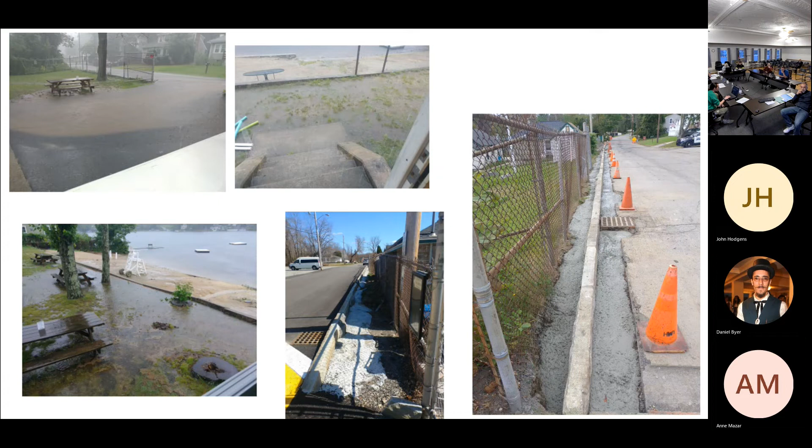So this is just kind of an overview of the project. Ideally, funding will get approved in May. We would then prepare an RFP to go out to bid for the base of this project. Some of this we can do while we're open, some work on the sidewalk. You're saying the funding approved, that's a separate article.

So this request, we're asking for $300,000. We would then award contracts in July, and the idea would be the work would start basically August 30th, as soon as we close. One of our challenges is we're open in the summer, so we have to kind of work around this so we don't lose the whole season. But we're hoping the majority of the big work can get done in the summer and the fall, and then that leaves the spring just for the final landscaping.

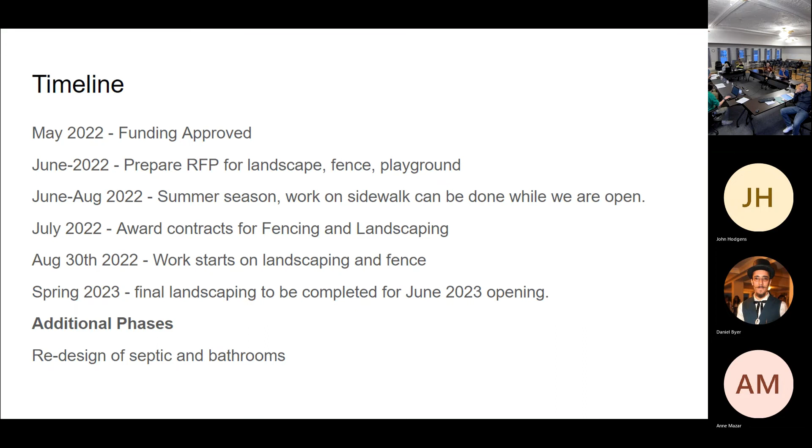People are looking to stabilize it too. I think most of the site work should be done, retaining walls, all the trees. Honestly, even initial loam and seed probably won't grow very well.

We'd like to replace the playground. There's a photograph of what's there now, which is kind of not much. There was a swing set that got taken down to make room for tree work. So it's gonna be a new playground area with 4 to 6 swings and slides. We're still working with the playground company on the specifics. They wanted to see these plans done before they start doing all the drawings.

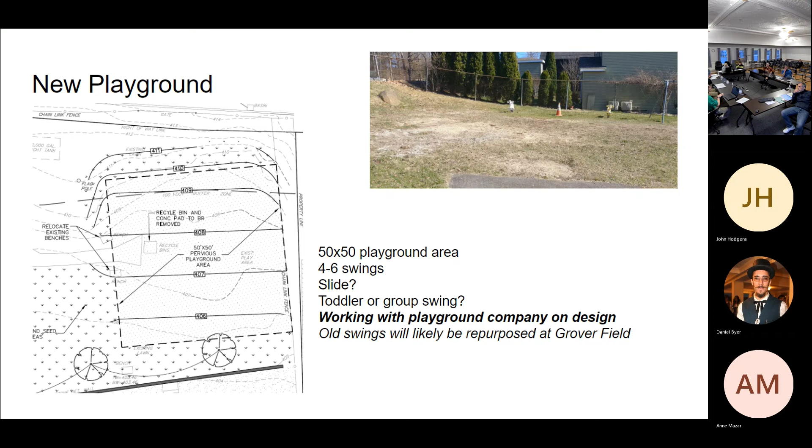What I learned, this is the side of Taft Ave, going to that boat ramp. So we're gonna fill this in with a sidewalk, so now it'll be a little safer for people to go over there, and also clean up this giant mess that's left with the curbing.

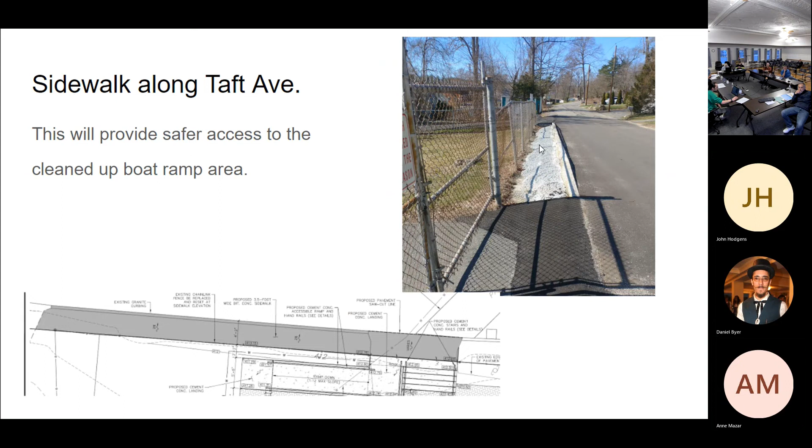The major thing that delayed us was the ADA compliant redesign of the entrance. The current entrance doesn't meet the proper slopes, it's too steep. We're also going to have a few pathways, with some better pictures on the next slide. The entrance is going to basically be a small staircase and then a ramp.

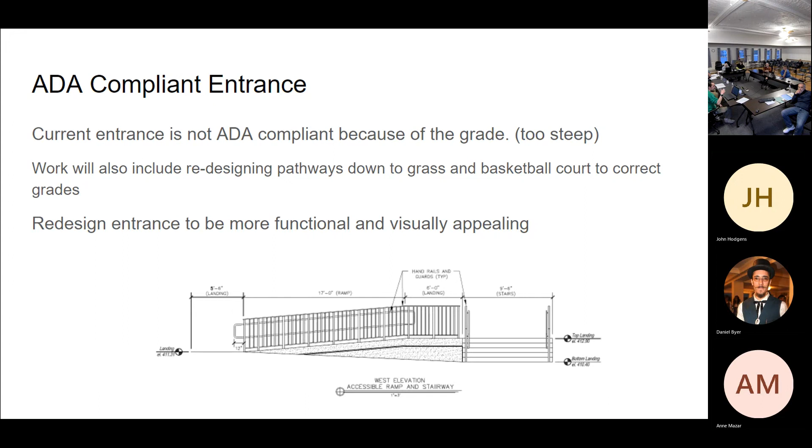And then further down, this is the beach house at the bottom. So this way you can come in the entrance, get down here on the basketball court, or down here at least to the grass area. It's just a major improvement from what's there now.

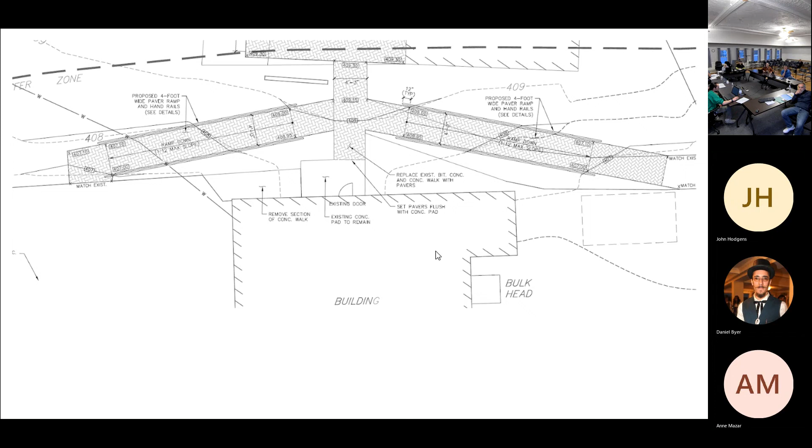These are also spec'd as pavers, again looking a little bit nicer than the broken concrete and asphalt kind of mess that's there now. This upper area is going to get cleaned up, with some sort of a small retaining wall along here, where this bench is shown. You can see this just looks like crap now.

We're struggling getting quotes on this. I spoke with one company, they've not responded. We have 2 more coming out on Thursday. They budgeted 20, I think I put 25 for this based on past projects at the park—they just did the softball fence for 6,000 or 7,000. Unfortunately, this is an area where I think COVID has really driven prices way up.

And Dan, this is... Yeah. Jeff, quick question.

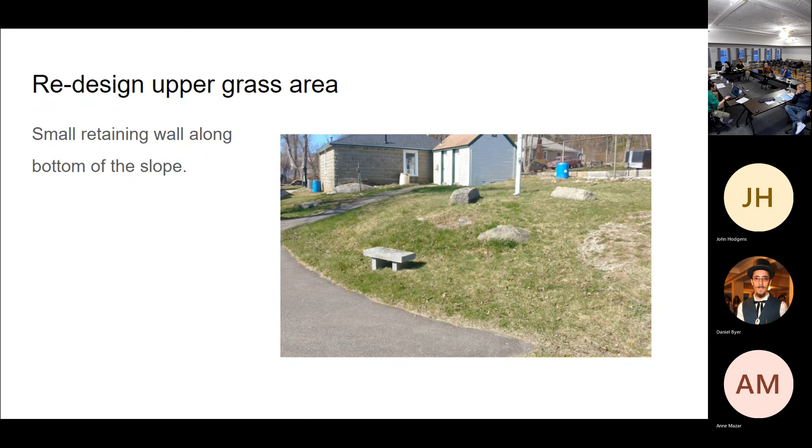On the previous slide, when you talk about the retaining wall, how much do you have budgeted for that part of the project? That's part of all the landscaping on the last slide—the number, I believe, is 210,000. So the major thing is these retaining walls, you can see they're all out of alignment. They're being pushed, some of this is from the water, from the trees. These are original to the property, I think they were there in the 60s.

So all new modular retaining walls, new stairs, railings. There's a lot of safety issues with that.

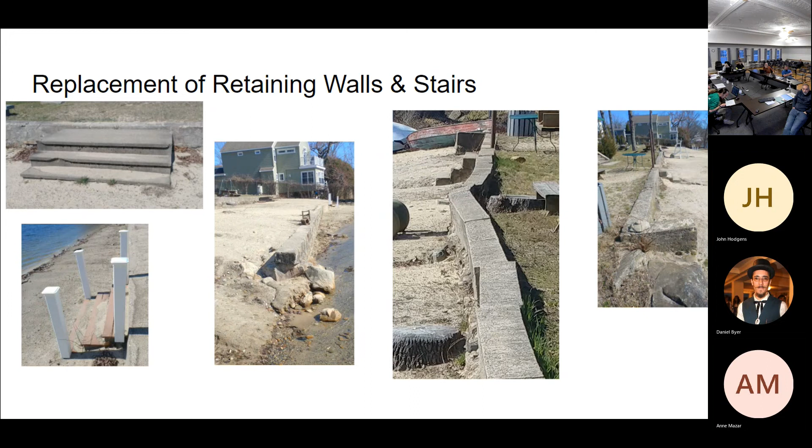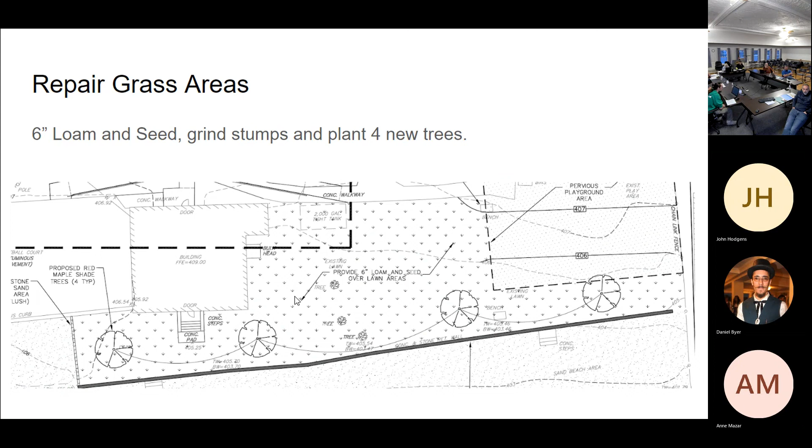New concrete modular units. Then loam, seed, some new trees—basically clean the place up, because it's totally been washed out and the roots have come up. Then the last phase is some site furnishings, new picnic tables, and hopefully a new dock if the funds allow.

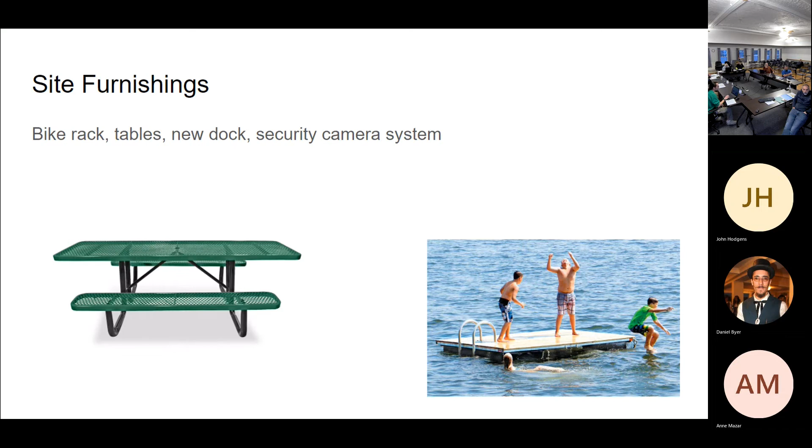We need security cameras down there. We're going to clean up this other side of the front—this will get turned into a bike area.

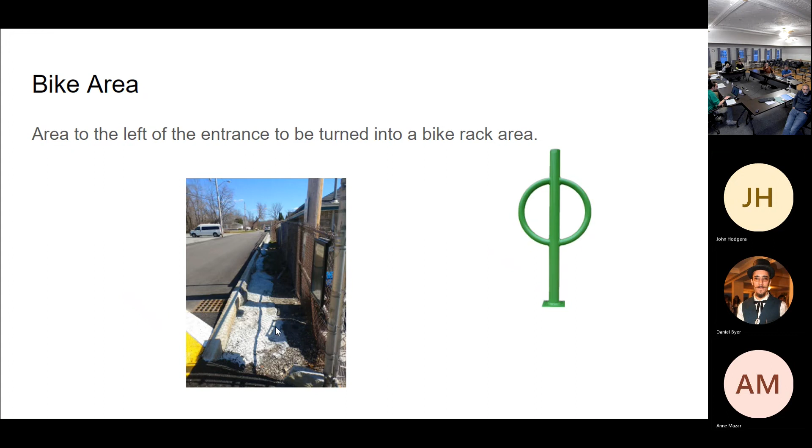So this is the current budget we're working with. We've got one estimate on the landscape work that came in at $164,000. That didn't include the sidewalk or any of the ADA stuff, because it was before this. Fortunately, that's going to be the big portion of this project. We're budgeting 210 for the landscaping, 25 for fencing, 25 for playground, 15 for site furnishings, and then a $25,000 contingency. That should cover what we're trying to do here.

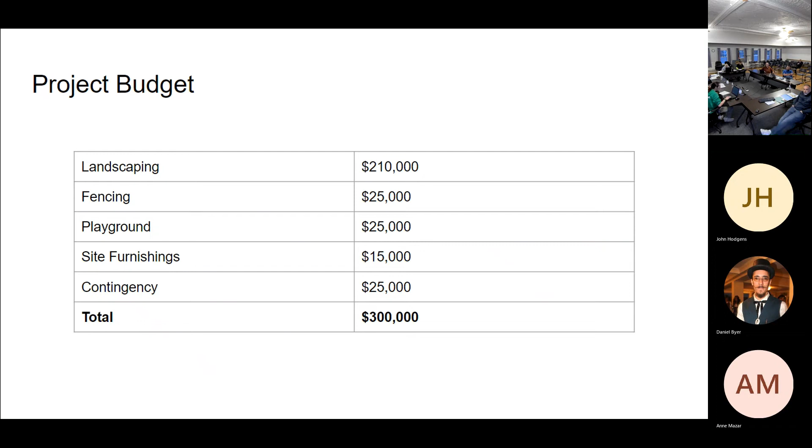We looked into getting a grant—I don't know if this came up for this board. Unfortunately, the timing would set us way back; the next opportunity would be November. We can't do any work until we have a contract, so we wouldn't be able to touch this until spring. The commission felt it would be better to save these types of grants for future projects.

We're looking at lights in the fields, possibly a second basketball court, possibly new fields. I think that seems to be a healthy amount of funding in the CPA.

Tom touched on this, but the reasoning behind this is to try and drive more traffic to the beach and generate more revenue. Pre-COVID we were almost breaking even, meaning income from admissions and lessons balanced the lifeguards. After COVID, that went right out the door. We're still trying to come back.

We're trying to get the lessons program going this year, but we've basically done nothing here. We've done the roof and some work on the septic and maintenance—stuff the town bought in the 60s and just kept going. So the goal is to really refresh the beach, bring it to life, and hopefully generate more traffic.

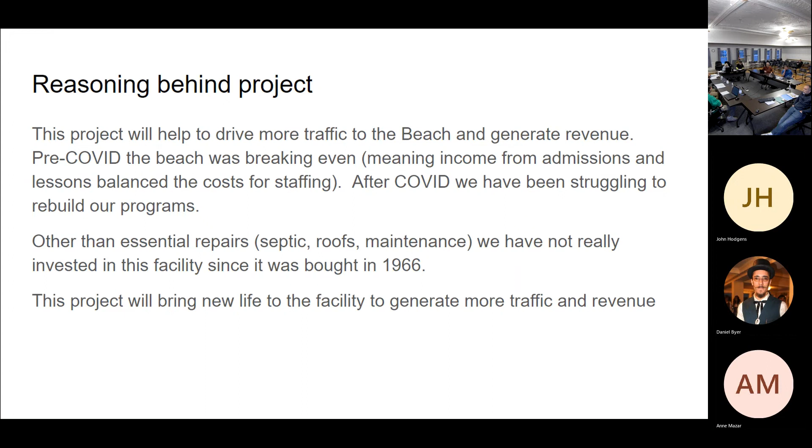On that paver slide that showed the ramp, where was your snack shack?

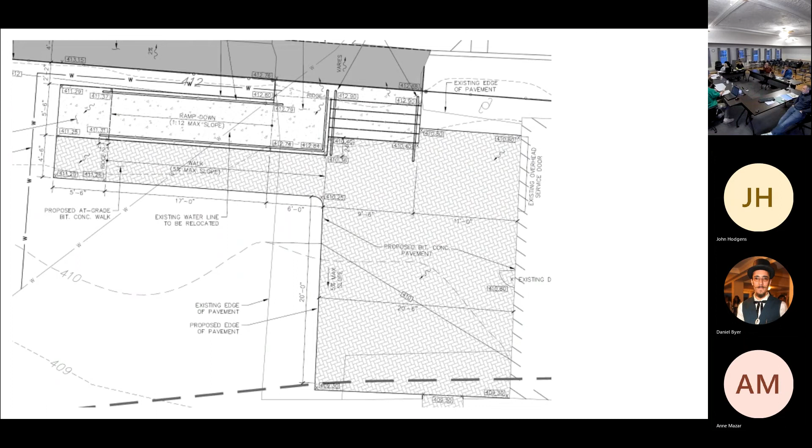Yeah, so the snack shack is up in this area. It's kind of a weird layout. In an ideal world, you could probably do things a little differently.

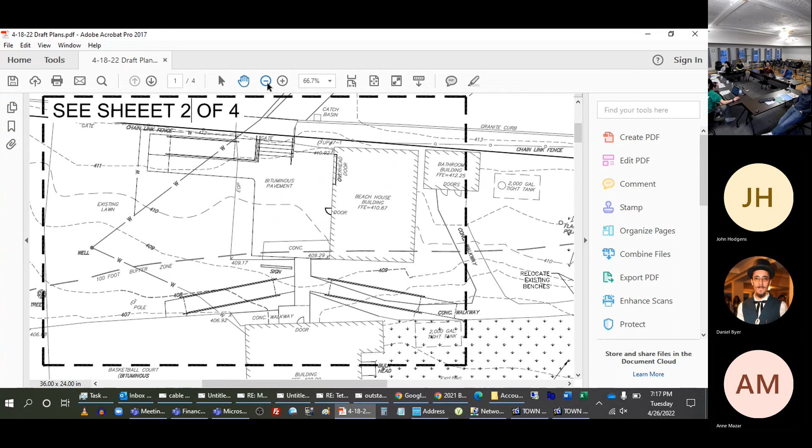Dan, do you mind if I ask Chief for some input? I think it's a great project—Dan Byer has done a great job trying to do something with barely nothing. Chief, have you taken a look at this? Do you have any input, especially for the future safety of the building and the people there?

Dan and I had talked about the overall project, back when we were discussing getting access for drafting out of the lake alongside the northern part of the beach, but I haven't looked at the buildings themselves. We should probably forward these draft plans to you for sure—that's a good point.

This will touch conservation. We're not changing the buildings or the type of work done in or with the buildings—it's the grounds around them. Right, and any changes to the building itself would really fall under the building official. The fire code is really for maintenance of existing stuff; anything new would be under the building department.

The fire did a major project, and that access path has been totally cleaned up, all the highways, so now they can get in there and draft and wait. But it also cleared that up for use by the public.

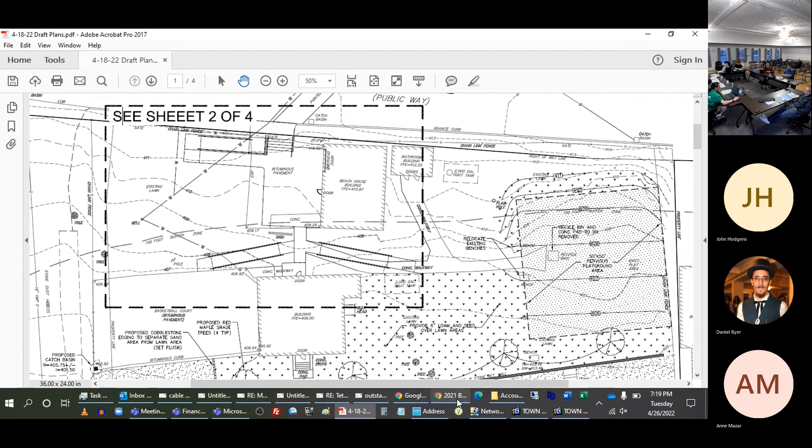On your RFP for the landscape, you had one? Is that something you write out of one RFP, or does that get broken up in divisions of construction? So I guess my vision was to...

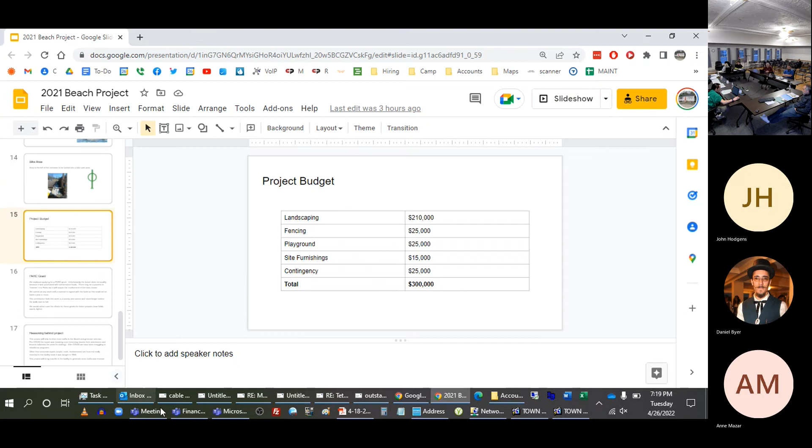The entire landscape would be one project: all the site work, all the retaining walls, the paving, the walkways. The idea would be to put that all into one package, have the landscape company serve as the general contractor, and they'll ensure all that's done.

The fencing will probably just be done as a separate RFP, and then the smaller things like cameras and playground. But I think the major site work would be one package — we'd look to hire one company.

On your presentation, Dan, I have a couple questions. Refresh my memory, since it's been a while since my kids have been down to the beach — they're 27 and 25 now. Can you tell me a little bit about the public access to the space? How can the general Mendon residents use the space?

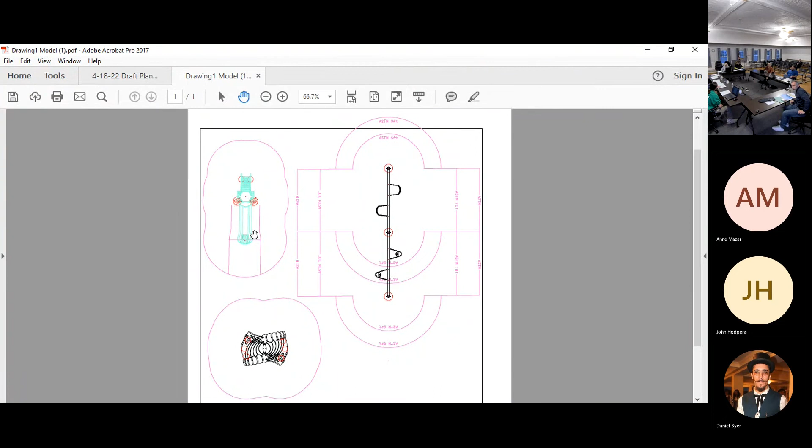As Dan mentioned earlier, Alan stepped up in the highway department to help us out and tap that out - that prevented some of the major water coming down from the field and parking lot. This phase is the grounds, so we're not going to get the swath of water every time it rains washing everything down. That's protected now.

We feel whatever we invest in now, the grounds will stay there, and we can easily maintain it with the crews we have, with the funds we get from the revolving fund. Then that final phase is inspecting the building to see what we can possibly do with them as far as renovations go, and looking at the sewer project - Dan had mentioned as well - getting off the tight tank into a leaching field. So that will probably all be one package in the future.

I'm not sure if that's CPA fundable or not, but that's another discussion. We want to look into buildings and certain services where they are, but I think we make it a nice picturesque beach - some playground areas, grass areas, sand areas, picnic areas, things like that, easily accessible. I think that's our goal right now.

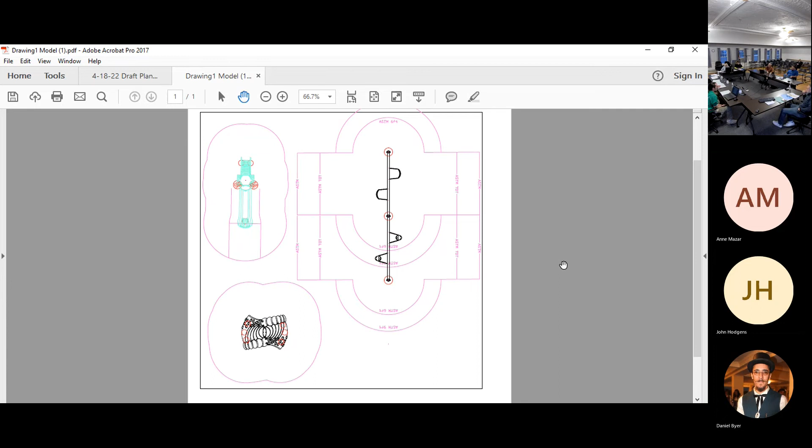And Tom, this is a real rough sketch of the playground. Unfortunately, one of the challenges is all the new rules, so this is what's called a fall zone. I think he modeled this on 40 by 50, and there's not a lot of room for a whole lot. We're going to try and get, I think, six swings, then some sort of small climbing apparatus, hopefully some sort of toddler swing.

That's definitely, I think, going to fit as much as we can. So the only other major thing to me is the bathrooms, but I think that's a big enough project that needs to be on its own. We need to do some current testing. Unfortunately, there's some technical things with the public water supply - challenging.

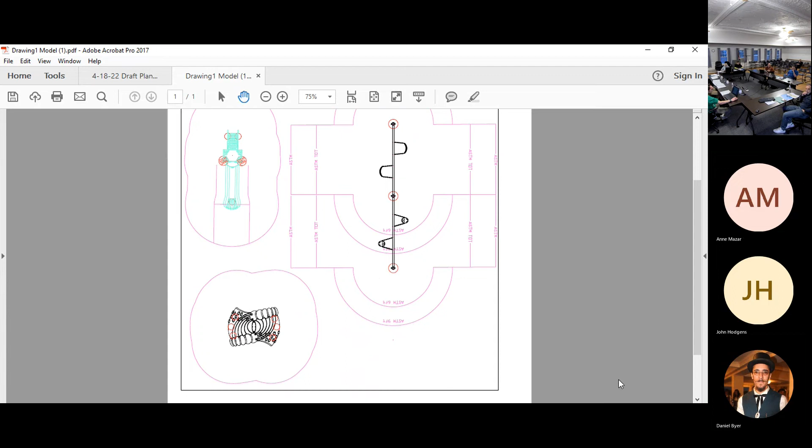I think some of the site furnishings, I will say, and I think that's why we included them - like the dock, the far dock - if you've been in the lake recently, the far dock is disintegrating, that needs to get replaced. The picnic tables are great, but they're very heavy, so we're going to move to something a little more movable down at the beach so they can be arranged for concerts.

Was it a lake weed situation? We don't have that much issue with weeds. I think they tend to accumulate in the coves off Old Tap in that area. They do treatments, and actually, thanks to a settlement, conservation did a massive initial baseline study in the lake. We got this whole giant report, and it's better than we thought. The lake is in decent shape.

I think one of the big challenges is it's so small. There are shallow areas that stop stuff from flowing as well as it could. We do have challenges with the E. coli levels. We need to keep working with the Board of Health to get everybody on the lake in tight tanks. But again, it seems like the issues we're having, as much as we'd like to blame it, they're not septic. It's just a very small lake, not a lot of flow.

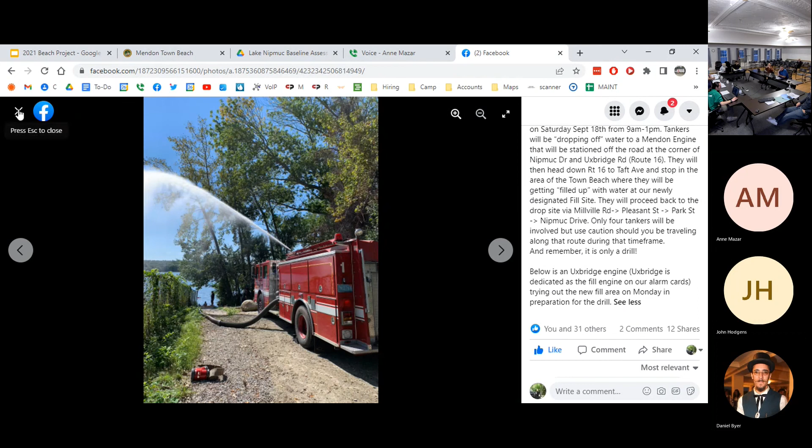Just by way of explanation, in case anybody can see the Uxbridge on that truck, that's part of automatic aid for us. Uxbridge will always go to that site to fill tankers. We call them, that's why we had them in there testing them.

Everybody good, John? In other words, I have the updated one that Anne sent, looked like to all of us, 658 tonight. That's what I've been looking at. That's why I was- yeah, and so I haven't talked to Anne, but you're correct, the number changed, that would change it.

But this one looks- we're not even close. You got an updated one? I got an update at 658 tonight. That's when I was sitting here, we were going- Anne sent you all the CPA.